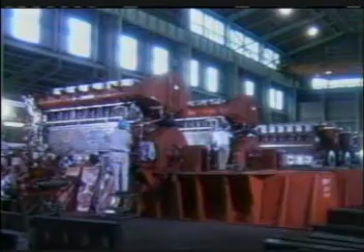The strength and power to move things. Daihatsu Diesel.

Daihatsu Diesel's advanced technology and unparalleled reliability help move the world.

On the ever-changing sea, Daihatsu Diesel marine engines help vessels of all sizes run safely, from large ferries and large-sized merchant vessels to small fishing boats and utility craft.

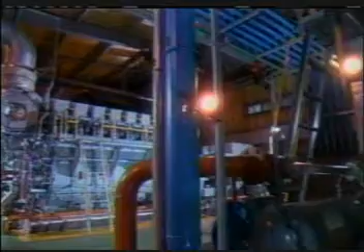In recent years, Daihatsu Diesel land engines have contributed to society with advances in energy-saving devices, environmentally conscious technology, and advanced computerization.

Daihatsu Diesel also provides first-rate after-sales service for first-rate engine performance. A 24-hour computerized system that controls over 3,500 types of parts allows for fast, precise maintenance. Daihatsu Diesel's vast network of domestic and international port cities offers a complete global service system.

Daihatsu Diesel's breakthroughs in research, development, and technical innovation promise to lead the industries of the 21st century. Catch a small glimpse of these breakthroughs through this video.

Daihatsu Diesel has been working on reducing exhaust emissions for over 20 years. The result is Daihatsu Diesel engines now satisfy IMO regulations with no increase in fuel consumption. They've become environmentally friendly.

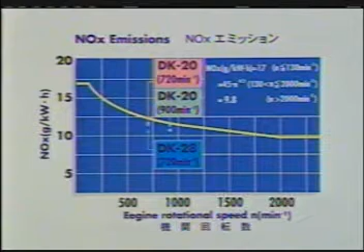Its dismantlement and assembly times have significantly decreased. The ISO requires cylinder 1 to be located on the flywheel side.

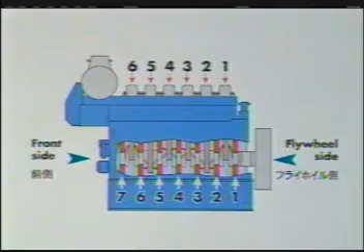This video shows the proper maintenance procedures for the model DK20. It deals with 4 sections: the cylinder head, pistons, connecting rods, and main bearing shell.

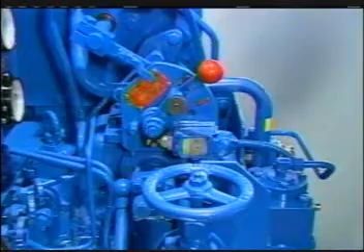First, the cylinder head. Prepare all necessary tools for dismantling. Before dismantling the cylinder head, set the governor handle to stop and turn off the air at the mains.

Next, turn off the water cooling system, fuel oil system, and the lube oil system at the mains. Then drain the cooling water from the engine.

Remove the cylinder cover. Remove all pipes around the cylinder head, namely the nozzle inlet and outlet pipes for cooling.

The starting air pilot pipe, and the outlet pipe flange for water cooling.

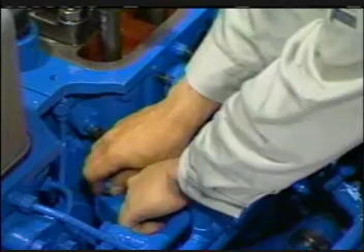Next, remove the bolts to the high-pressure fuel oil block. At this point, use compressed air to blow all fuel from the fuel oil block. Cover it so that no debris enters the fuel oil outlet of the injection pump.

Remove the inlet connectors of the nozzle holder. Remove the exhaust pipe. Be careful not to confuse the stainless steel exhaust pipe attachment bolts with other bolts.

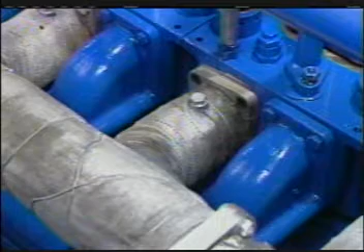It's unnecessary to remove the intake band. Loosen the rocker arm tightening nut.

Remove the rocker arms and the valve push rods. Use the proper tool to pull out the nozzle holder.

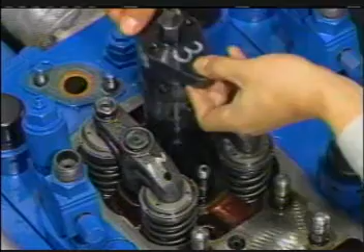Install the hydraulic jack, then screw on the pulling bolt. Make sure the notch faces outward so that the jack stand does not touch the cylinder head.

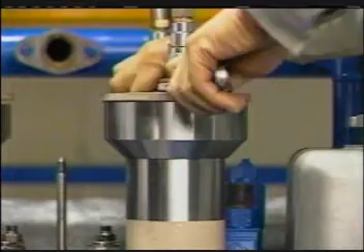Before applying pressure, turn the hydraulic piston into the hydraulic cylinder as far as it will go. Mount the jack into the pulling bolt, then twist it back a half turn.

Raise the oil pressure to the regular level. Loosen the fixing nut. Then lower the oil pressure slowly with the pump's release valve.

Use the special tool for lifting the cylinder head. Remove the cylinder head.

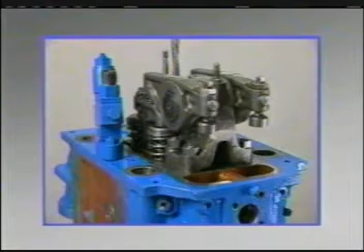It's also possible to open up the cylinder head without removing the rocker arms. After removing the cylinder head, be sure to place a cover over the cylinder liner and intake pipes to avoid getting any dust or debris into the engine.

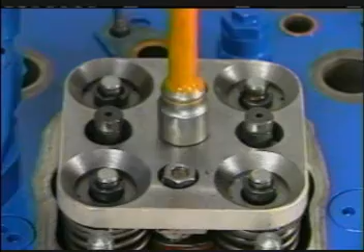Be careful not to damage the bottom of the cylinder head. Use the special tool to simultaneously remove the 4 intake and exhaust valves.

Before maintenance, check for carbon buildup on the combustion surface and intake and exhaust ports of the combustion chamber. Be sure to clean the combustion surface properly.

Next, perform a color check. You'll need to pay special attention to the combustion surface because it's exposed to high pressure and high temperatures.

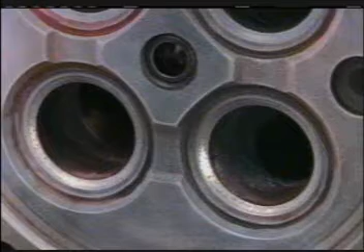The stem diameter of the intake and exhaust valves are measured at 3 different points with a micrometer. Use vernier calipers to measure the thickness of the valve seat height.

Also use calipers to measure the inner diameter of the intake and exhaust valve guides. Record your measurements.

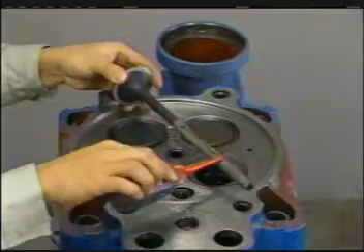Lubricate the valve stems with oil, then grind the intake and exhaust valves. Use various grades of carborundum.

When using a coarse grade, grind the valves by tapping. Use the finer grades for finishing work. Here you grind the valves by turning.

Wipe off the carborundum completely. Then check the points of contact with bearing blue.

Make sure there are no scratches, debris, or any sign of damage or corrosion on the surface of the valve springs, or no sign of wear and tear or damage on the seat.

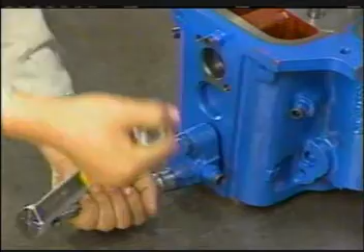Next, the procedure to dismantle the starting air valve. First, remove the cover and pull out the starting air valve. Dismantle it, clean all parts, and reassemble it. Then grease the starting valve.

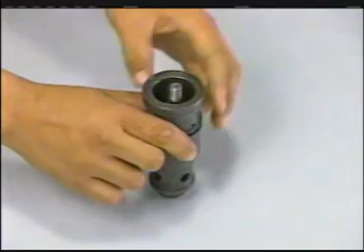Insert the spring, the piston, tighten the nut and divide the split pin carefully. The split pin is made of stainless steel.

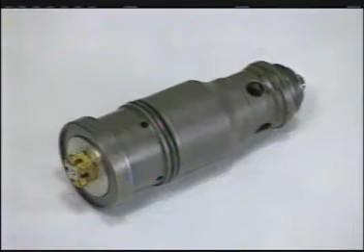During reassembly, be sure to change the O-rings and packing. Grease them before reassembly. Then tighten the bolts to the prescribed torque.

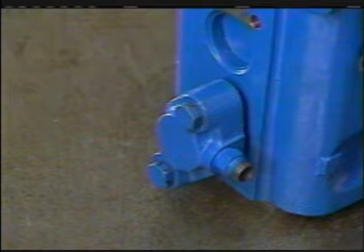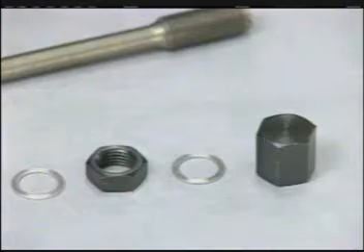Now we'll dismantle the fuel oil injection nozzle. Clean all parts during this procedure. Check the injection holes at the tip of the nozzle.

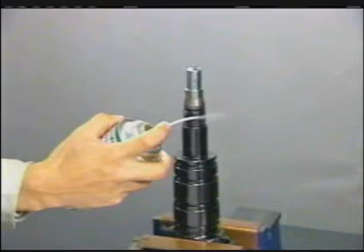Attach the spacer to the nozzle holder. Then insert the nozzle tip. Spray Molykote on the holder screw and retaining nut seat before tightening them to their prescribed torque.

Attach the nozzle tester and set the injection pressure. Loosen the holder adjustment screw. Set it to regular pressure before tightening it.

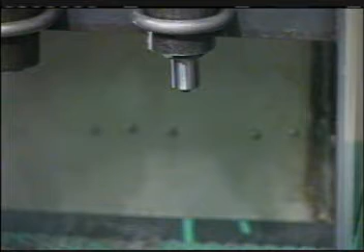Make sure the nozzle sprays properly a couple of times at 300 kilograms per square centimeter. Avoid touching the nozzle while performing the test. Make sure that oil does not leak from the nozzle tip injection holes.

Clean the seal parts of the cylinder head and the cylinder liner of the engine frame. Replace the cylinder head gasket, cooling water guide O-rings, starting air valve body O-rings, pushrod rubber seals, and intake bend seals.

Remove any extraneous substances from the cylinders before reattaching the cylinder head. Make sure the nuts face up before screwing them on. Install the hydraulic jack the same way you took off the nuts. Tighten the nuts firmly by using a hammer to tap the tool handle.

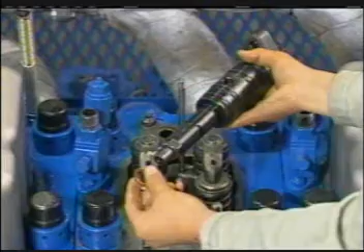When reassembling the nozzle holder, check for any remnants of the old gasket before installing a new gasket. Two bolts are tightened to the prescribed torque. Turn the flywheel to the combustion top position. Then insert the push rods.

Loosen the valve guard T-screw. Apply the dial gauge to the adjustment screw on the rocker arm side. Tighten it until the gauge needle moves. After finishing the adjustments, tighten the lock nuts completely.

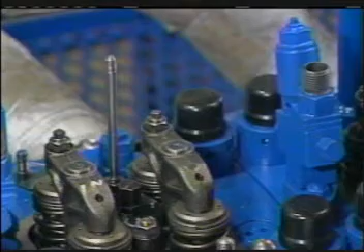Loosen the rocker arm adjustment screw before replacing the O-ring under the rocker arm. Then set the rocker arm metal piece and attach the rocker arm. Adjust the rocker arm gap with the thickness gauge. Then tighten the lock nut.

Make sure the seat surface of the inlet connector is clean before attaching the inlet connector. Tighten it to the prescribed torque.

Replace the top O-ring of the fuel oil injection pump. Now make sure the joint and seal of the fuel oil high pressure block is clean and damage-free before attaching the piping. Tighten the bolts to their prescribed torque. Reattach all piping around the cylinder head and replace all gaskets and packing.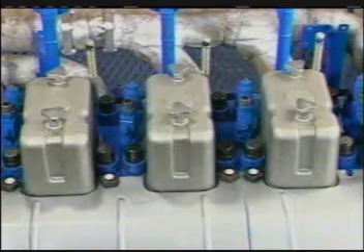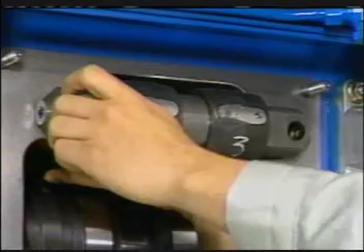Now let's take a look at the valve operating device. To remove the intake and exhaust swing arms simultaneously, remove the swing arm attachment bolt which transmit the cam movement to the push rods.

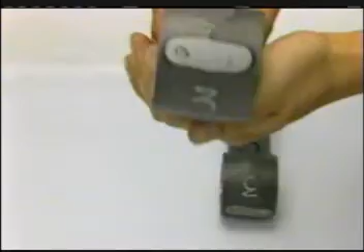You can tell the difference between the intake and exhaust swing arms by an engraved mark on the shaft side. E means exhaust. If the rollers have too much play, change the swing arm. Check the gap between the intake swing arm, marked with an L, and the roller in the same way.

The swing arm attachment bolt is special. It also acts as an oil application joint. Tighten these bolts to their prescribed torque.

Next, fuel oil injection pump maintenance. First, remove the fuel oil injection pump. Fix it to a vise, then remove the stopper pin by pushing the tappet.

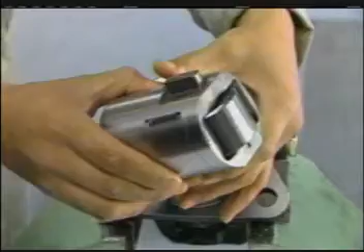Next, remove the following in this order: the tappet, plate, spring seat, spring, plunger, spring seat, control sleeve, control rack, and deflectors.

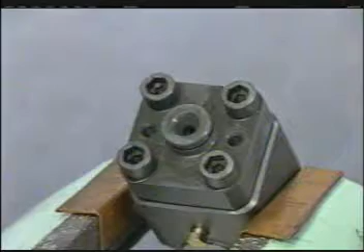Now remove the delivery valve assembly. However, do not dismantle the delivery valve. Remove the stopper bolt and set screw for the air breather.

Remove the plunger barrel, just push it up from the bottom. Next, make sure there's no cavitation on the barrel, plunger, and deflectors. Wash and blow all parts.

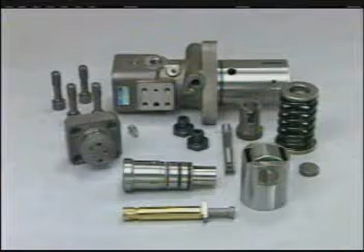To reassemble the fuel oil injection pump, start by making sure that all the parts are organized. Remember to replace all O-rings and backup rings.

Insert the barrel. Grease the O-ring, then line up the bolt hole with the barrel groove. Grease the O-ring before attaching the delivery valve dowel pin.

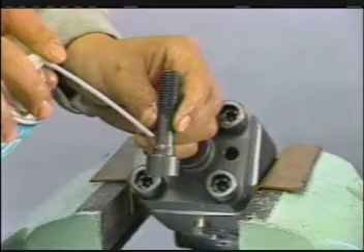Spray the bolts with Molykote, then tighten them to their prescribed torque.

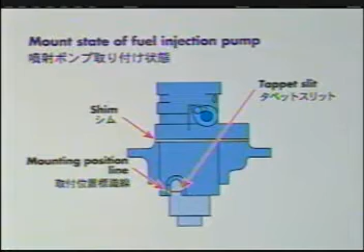Check the height of the fuel oil injection assembly by checking the tappet slit. Use shims to adjust the assembly's height.

Next, piston and connecting rod maintenance. Put the piston in the bottom dead center position.

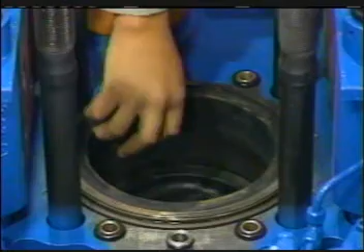Use sandpaper to remove carbon buildup in the combustion chamber of the cylinder liner. Use a thread tap to remove carbon from the piston hanger screw holes.

You don't have to dismantle the large end of the connecting rod when removing a piston.

Before removing the piston, remove the wiring. Now remove the connecting rod bolt.

Next, attach the piston hanger fittings to the upper part of the piston.

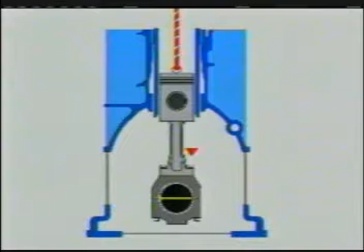Then pull out the piston.

Cover the cylinder liner so no foreign substance or debris gets into the engine. Lift the connecting rod slightly. Remove the retaining ring on one side, then pull out the piston pin.

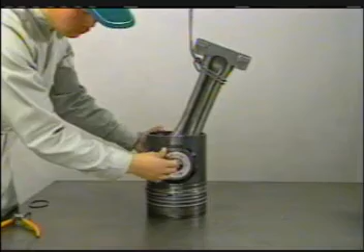Check for damage or carbon buildup. Check the chromium plating and check for carbon deposits on the piston rings.

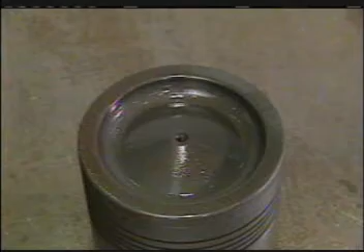Use sandpaper to remove carbon deposits on the combustion surface, but do not use sandpaper for the skirt. Perform a color check to check for cracks on the combustion surface.

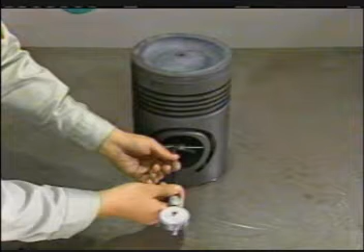Now measure the piston: piston pin bore, ring grooves, connecting rod small end bore, piston pin, and piston rings.

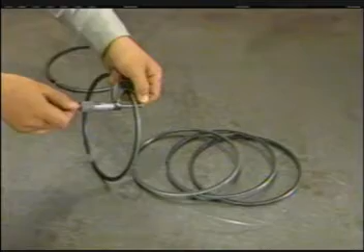Remove the cylinder head packing and O-ring and clean the cylinder liner. Measure the inside diameter of the cylinder liner like this.

Open the connecting rod large end bore to check and replace the crank pin bearing shell and crank pin bolt. Then turn the large end bore sideways, then turn it toward the cap insertion tool.

Remove the wiring. Now loosen the crank pin bolt.

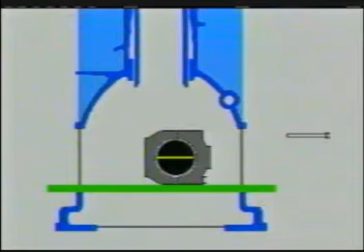On the bearing shell back and joint surface, check for fretting, substance buildup, or any foreign objects. Use a spherical micrometer to check the amount of abrasion.

Check for damage or fretting on the serrated joining surface and rod part. Perform a color check to check for cracks on the serrated surface.

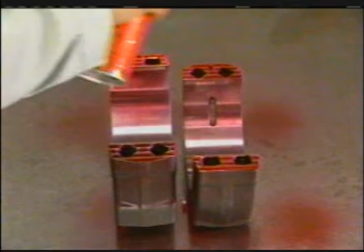Check for damage and abrasion on the screw and mating surface of the crank pin. The crank pin bolt and connecting rod connecting bolt may have wear due to embedding after long operation. If this is found, a new tally mark must be applied.

Tighten the crank pin bolt at torque A without the bearing shell. Spray the mating surfaces of the bolt with Molykote.

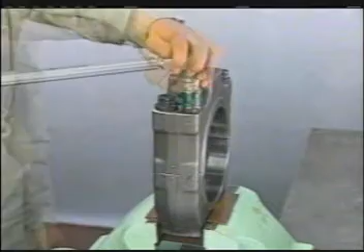At the prescribed torque, tighten the bolts in this order: 1, 4, 2, 3, 1.

Make a connection mark for torque A on the bolts, then tighten them to the B mark. Follow this same procedure when inspecting the connection rod connection bolts.

Before putting a torque A mark on a new bolt, put the old bolt number on it and tighten it a couple of times so that it fits to the torque B mark.

You can measure the inside of the large end bore when the bolts are tightened to their prescribed torque. Now let's assemble a connecting rod large end bore.

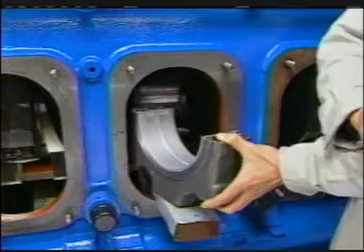Clean the crankshaft and put oil on the bearing shell. The bearing shell is assembled from both sides to avoid damaging the crankshaft.

Make sure that the connecting rod large end bore is assembled according to cylinder number, and make sure that the embossed surface faces the opposite side of the direct connection.

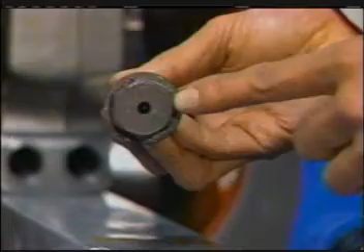The assembly order is determined by the numbers on each bolt. Be sure to spray the mating surfaces of the bolt with Molykote.

Hand tighten each bolt as far as it can go. Now use a torque wrench to tighten them to torque A.

The order is 1, 4, 2, 3, 1.

Next, use the same procedure to tighten the bolts in order from the connection mark on the bolt side to mark the B position on the connecting rod side. Turn the bolts till they stop.

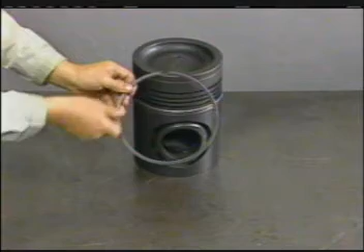Before assembling a piston, wash and blow all parts. When fitting an oil ring, its manufacturing mark should face upward.

Assemble the coil so that the coil joint faces the opposite side of the ring open end. Now attach them.

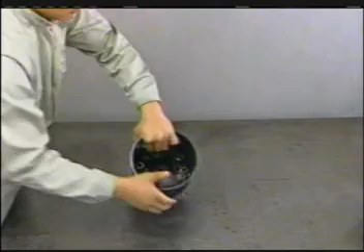When assembling a piston and connecting rod, match the embossed surface on the lower part of the connecting rod to the F mark on the piston's combustion surface.

Insert the piston pin. Now insert the piston pin retaining ring into the groove.

Apply oil to the piston rings, making sure that the open ends are staggered by 90 degrees and are not in alignment.

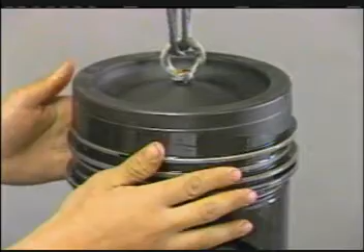Place the piston insertion frame into the upper part of the cylinder liner. Apply oil to the cylinder liner.

Move the crank pin to the lower dead point. Slowly insert the piston into the cylinder liner.

Bring it down gradually. While joining the large end board to the connecting rod lower, also join the knob.

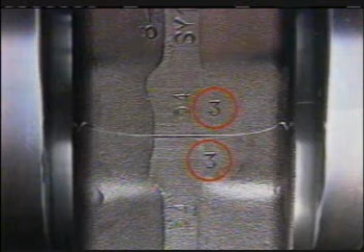Spray the mating surfaces of the connection rod connection bolts with Molykote and attach them according to their identification numbers.

Tighten the connection bolts at an angle to mark B, the same way the crank pin bolts are tightened. Check thoroughly for lateral movement before turning them till they stop.

Let's move on to the main bearing shell maintenance procedure. Remove the side cover. Prepare the necessary tools.

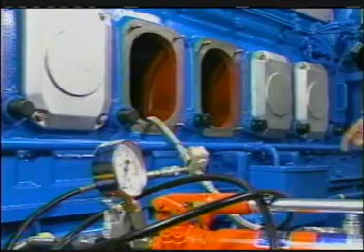Remove the side bolt cap and install a hydraulic jack to the side bolt.

Raise the jack on both sides of the side bolt while applying the prescribed pressure. Loosen the nuts.

Next, lower the pressure gradually with the pump release valve.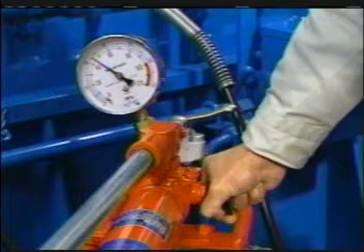Attach the hydraulic ram holder fittings to the main bearing shell cap and set the hydraulic jack mounting tools.

Install the hydraulic jack. Turn the handle on the lower part and raise it until the jack reaches the main shaft holder bolt.

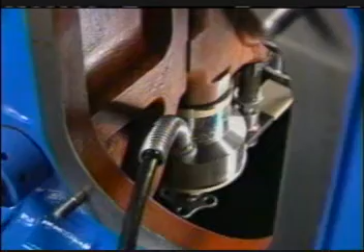Attach the hydraulic jack to the main shaft holder bolt. Apply pressure and loosen the nuts.

Remove hydraulic ram 1 from the main bearing bolt. Insert the cusp of hydraulic ram 2 into the hydraulic ram bearer and fasten ram 2 with the proper bolt.

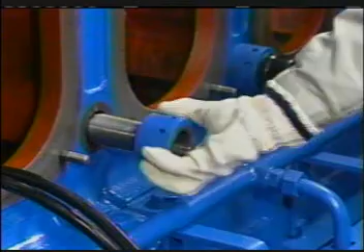Remove the side bolt. Switch over to the hydraulic ram by slowly turning the main metal cap valve toward the ram.

Then remove the main metal carefully. Do not pull the main metal cap from the spigot joint completely.

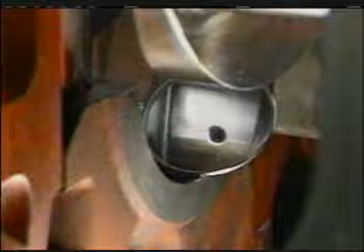Insert the metal extraction tool into the hole of the crankshaft. Be careful not to let the tool slip from the oil hole.

Turn the metal extraction tool 180 degrees until it makes contact with the upper metal. Then remove the upper metal.

During this process, take care not to scratch or dent the upper metal.

Inspect the inner and rear surfaces of the upper and lower pieces of the metal for scratches or any other irregularities.

Next, use a circular micrometer to measure thickness.

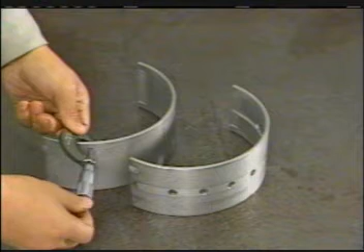Let's move on to the needs and requirements of the main bearing shell assembly. This piece with the oil groove is the upper metal.

Ascertain the position of the housing notch and metal claw. Make sure the inner surface of the metal is clean. Then, with your hand, push the metal away from the claw-free side.

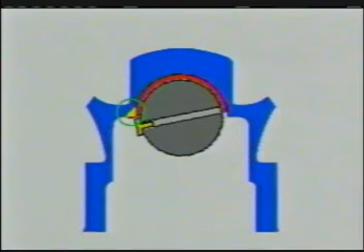Use the metal extraction tool to turn the crankshaft in the direction of the housing. When the metal and the housing are properly aligned, remove the metal extraction tool.

Then you'll be able to use a mirror to check the condition of the metal. Next, use your hands to check the crankshaft for scratches or foreign matter.

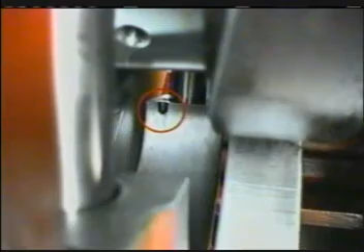Check the lower metal, main metal cap, and position of the claw. Do not apply oil to the back of the metal. Attach the lower metal.

Use your fingers to apply oil to the inner side of the metal. Raise the main metal cap.

Apply molykote to the side bolt. Screw it in completely. Then twist it back a half turn.

Next, set the hydraulic jack. To attain the prescribed pressure, simultaneously place the two metal cap bolts in their holes, and with a hammer, tap their handles to set the bolts in place.

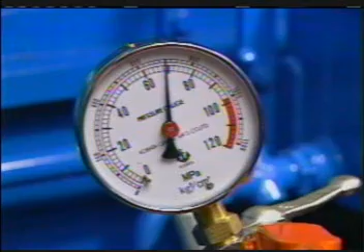Then tighten the side bolts the same way as the main metal cap bolts.

After the operation, open the crankcase and check to see if the lubricating oil priming pump is working and lubricating properly. Check to see if it turns easily.

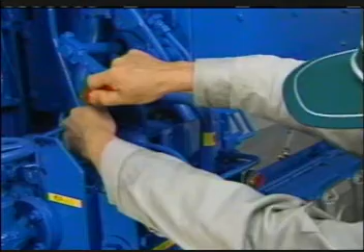When the maintenance process is properly completed, the engine should run effortlessly. Go over various parts of the engine by touch to check for any abnormalities.

Stop the engine. Remove the side cover and check the temperature of the bearings. At the same time, check for abnormalities.

You've just seen the periodical maintenance process for the DK20. For further information, please consult the manual.

Here are some points to remember. Be aware of safety clothing.

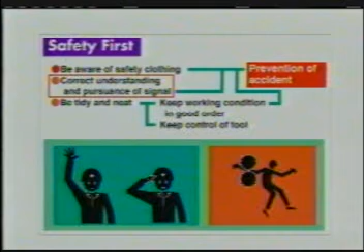Correct understanding and pursuance of signals. Be tidy and neat. Keep working conditions in good order. Be tidy and neat. Keep control of tools.

Keep measured data. Use genuine parts. Look for tally marks. Tighten to the specified tightening torque and tighten to the specified hydraulic pressure.

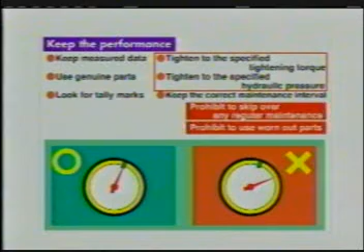Keep the correct maintenance intervals.

As seen in this video and noted in the instruction manual, proper maintenance is necessary to ensure your engine's long life and efficiency.